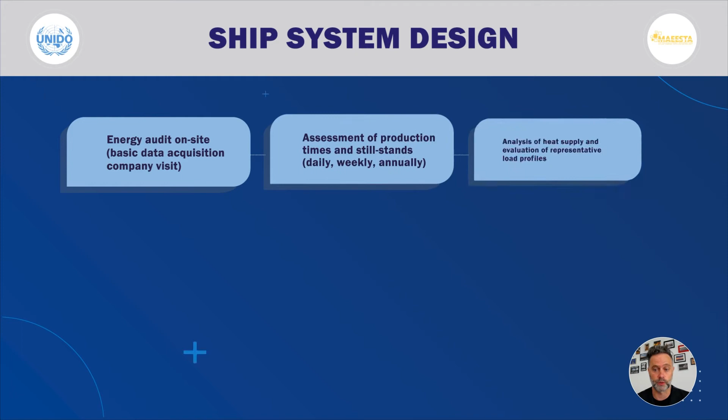You already heard about the potential of solar heat for industrial processes worldwide and specifically in Malaysia, the necessary energy assessments and the best practice examples worldwide. SHIP is a state-of-the-art technology well proven and operating since decades, but it is mandatory to follow a clear methodology for the optimized design to ensure that you are happy with the solar system at the very end.

Tick in your mind the checkboxes when you have already achieved this in your company or your project. You have done an assessment on the industrial energy system. Data is available and a company visit was done. Don't get me wrong, but you can't work on something you have never seen, so designing by doing. You know about the load profiles of the energy demand, a 24/7 production or only one shift from Monday to Friday, significant variations over the year. We have to consider this.

How efficient is the existing supply system? We have to know about real performance and not only the full load operation. In most cases, there is a huge difference. As we heard in video 2, we want to decrease the energy demand first. So energy efficiency is the first fuel. And we don't want to pay for something we don't really need, right? So we optimize processes and we make use of excess heat.

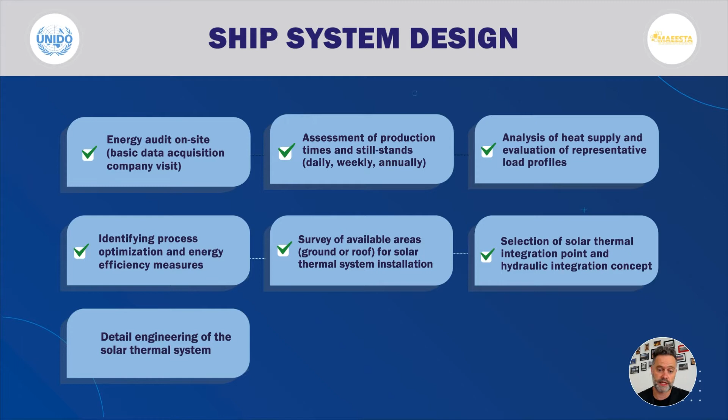Well, a natural gas boiler needs space, so do solar collectors. We have to be honest, solar collectors need a bit more space than a boiler. But we use your roof and available space on the ground. And we have to identify the optimized integration point of the SHIP system. No worries, this is standardized and experts worldwide have developed this methodology by 2014. As said, this is a proven state-of-the-art technology. And having all this done, we start with the design of the solar thermal system.

So what is the SHIP system about? It is not only the collector, but of course the collector is the centerpiece. The sun heats up the fluid inside the system. This can be water, oil, air, whatever you need or depending on the energy demand you have. With the hot medium, we load a storage tank. So this enables the possibility to cover the energy demand in times when there is no sun shining during the night or when there is some rain, for example. So by discharging the storage tank, we deliver the energy to the industry and if necessary, we integrate a conventional backup system and in most cases, this is already there.

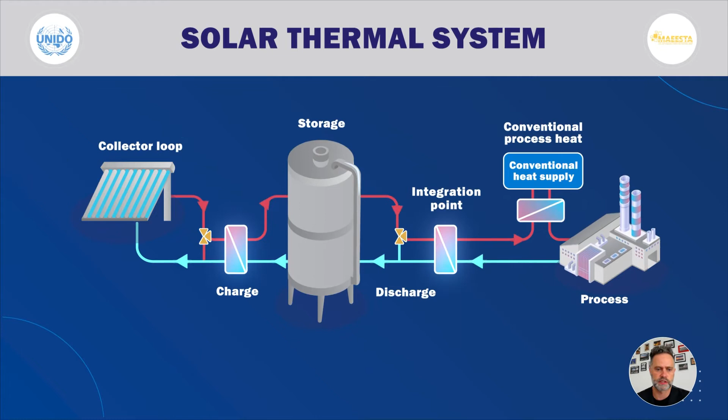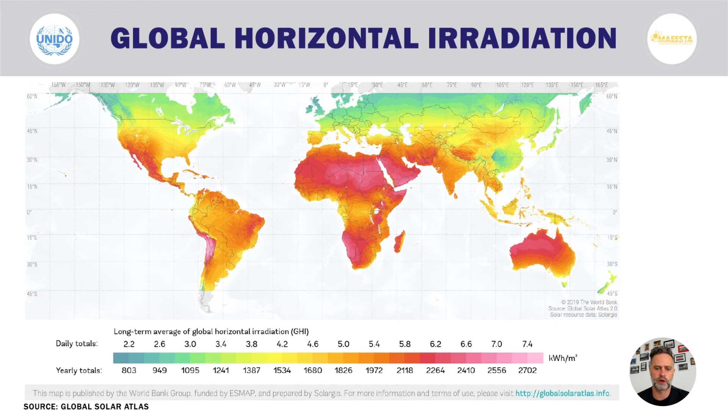Looking at the world map, we see areas in almost all colors: red, yellow, green and a bit blue. If you are located in a red region, it is obviously hot and you can harvest a lot of solar energy. I'm coming from Europe and you see that we have mainly green areas there, but we have a very, very high number of successful and economically feasible operating SHIP systems. Why? Because the experts just did a great job.

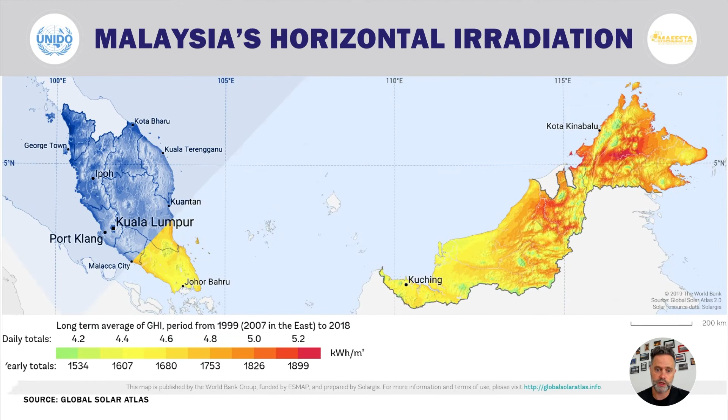Being lucky living in Malaysia, not only that it is a great country I love to visit, you have plenty of solar energy with almost red areas. So spot the place where you are and you see how much energy there is for free. As said, we need some space for placing the solar thermal collectors.

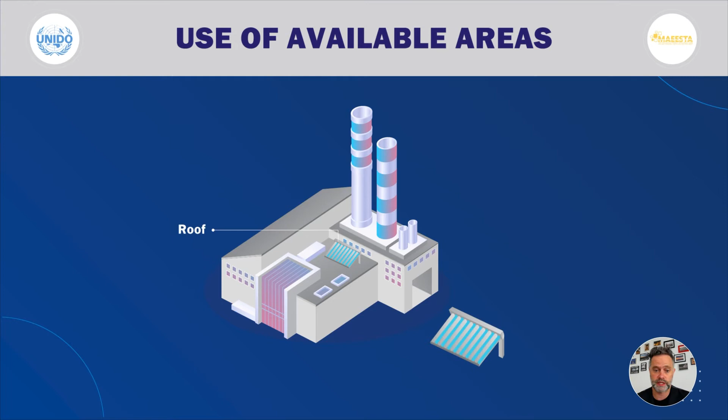Do you have some roof space? The expert will check the static conditions. Is there space on the ground? Even better, and don't be worried, there will be a lot of plants growing around the collectors. The good thing in Malaysia is it makes almost no difference how your ground or roof is oriented.

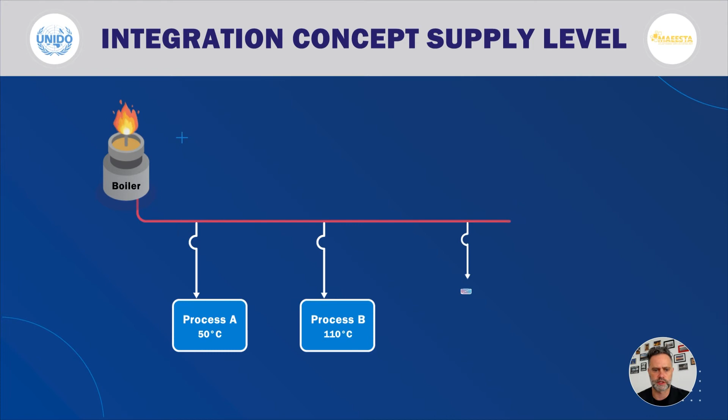As a result of the energy assessment, we know all details about the status quo of the energy system. In the example, we see 3 processes operating at different temperature levels being supplied by a centralized hot water pressurized system at 130 degrees Celsius and a return temperature at 110 degrees Celsius. We see in our example that the 130 degrees Celsius system is supplying processes with a heating demand at 50 degrees Celsius only. The result are high losses and a pretty inefficient system.

Basically, we have now 2 options to integrate the heat coming from the SHIP system. The easiest way is to do it on the supply system level. So we connect our pipes to the existing system. We install a heat exchanger, heating up the return flow completely or partially from 110 degrees Celsius up to 130 degrees Celsius. So we need one heat exchanger, simple integration, all processes are supplied and we have no changes in the processes. But there is one disadvantage. The higher the temperature from the solar system, the lower the efficiency of the collector is. So this is a trade-off between system complexity and the efficiency of the collector.

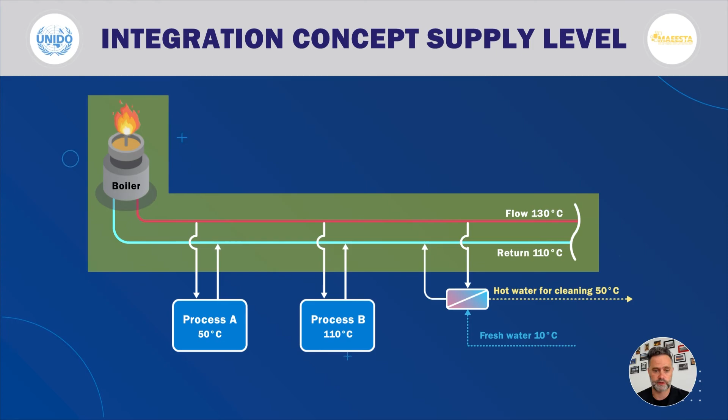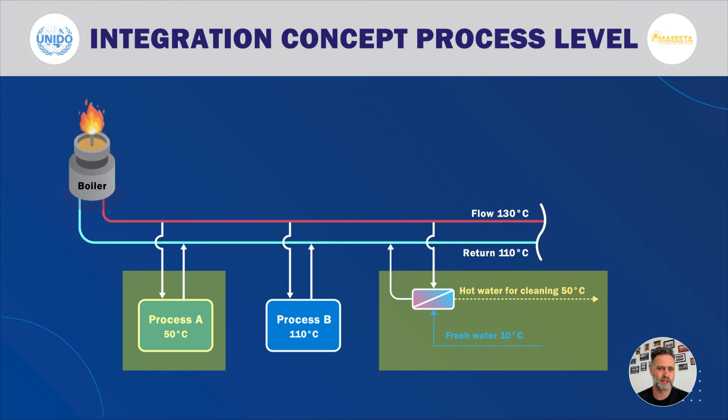The second possibility to integrate the SHIP system is on process level. So we specifically design the system for the most feasible processes and by this increase the efficiency of the collector. In our example, these would be the processes operating at lower temperatures. This might lead to 2 or more separate solar systems, 2 heat exchangers, one for each process. So the system complexity increases, but the efficiency of the collector and the whole system is significantly higher. In both options, the impact is a reduction of the energy demand supplied by the boiler, the energy costs, the CO2 emissions, and the dependency on external energy supply.

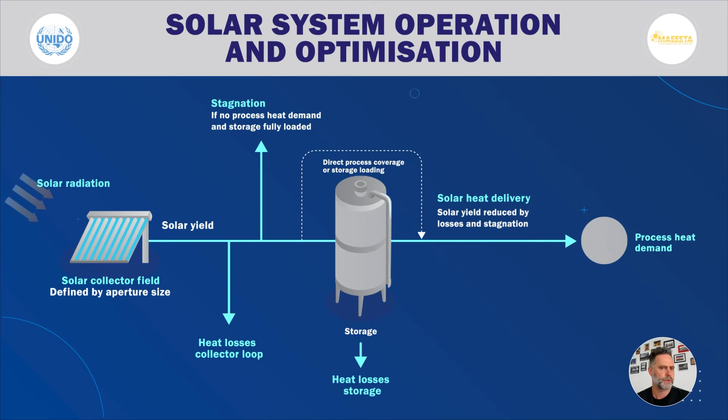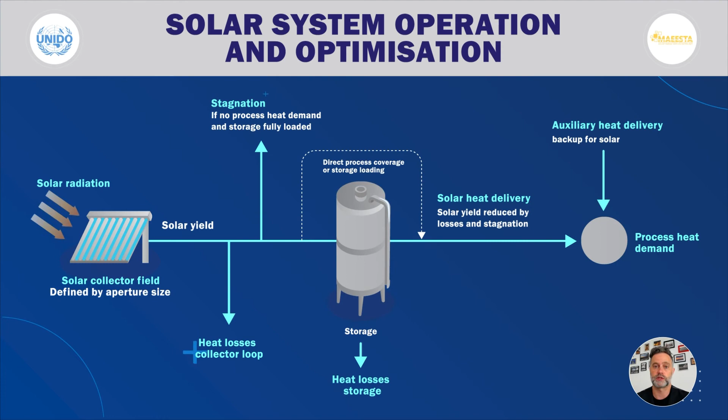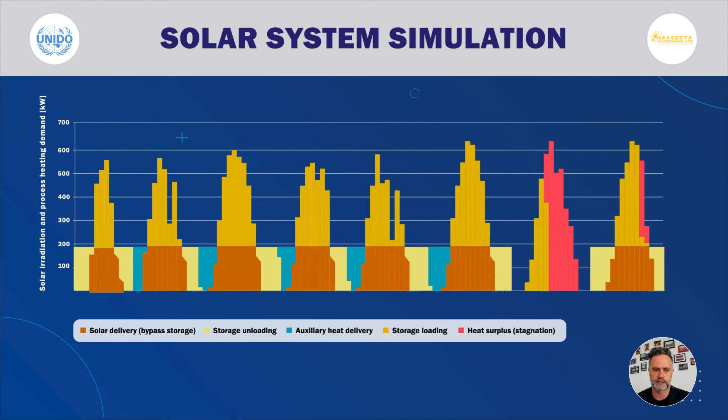Having this draft system designed, we optimize it, maximize the yield from the collectors, we minimize the heat losses, we optimize the system efficiency, and we avoid malfunctions as, for example, stagnation by a standardized control system. We vary the sizes of the collector, of the storage tank and the heat exchangers, and with this optimize the whole system. Standardized tools perform system simulations based on the design concepts, and we are highlighting there, for example, the yield from the SHIP system, loading the storage, discharging the system and providing energy to the processes. The result is the optimized system design ready for implementation.

To summarize, SHIP is not rocket science. It is a state-of-the-art technology but needs a clear methodology to be designed. You perform a detailed energy assessment beforehand, implement optimization measures to reduce the energy demand. And based on this, you design and optimize the SHIP system. Including the economic and ecologic assessments, this is the basis for the approval by the top management, so they will be really happy if you have done a good job. Implement the system, do a proper monitoring to see how efficient your system operates and optimize it if necessary. And the result is a reliable and sustainable energy supply system.